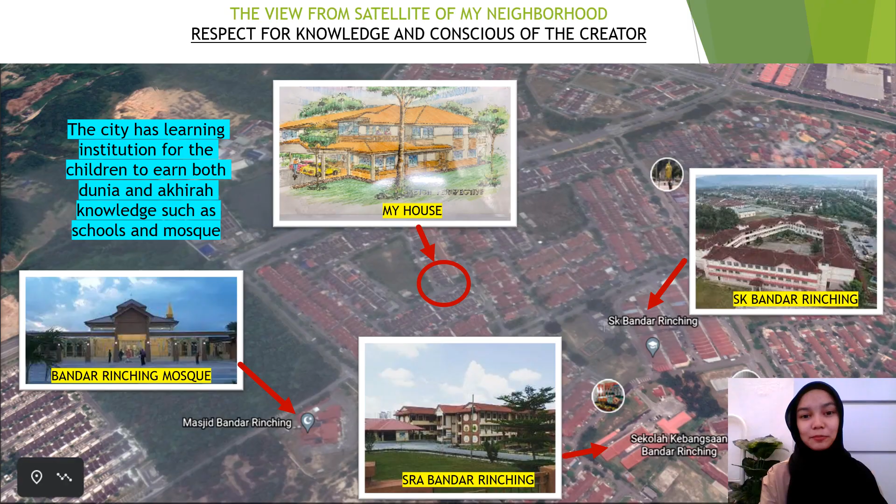Next, as for respecting knowledge and consciousness of the creator, my house fully abides to the principle of Al-Fatiha under the relationship between man and creator. The living room area is particularly used for the household to perform Jama'ah prayer, especially during special occasions such as Tarawih prayer, Salat Hari Raya Aidilfitri, Salat Hari Raya Aidil Adha, and Salat Fardu. This prayer hall has gathered everyone to reunite and perform sujud to Allah Subhanahu Wa Ta'ala.

To be conscious of the creator, having wide windows in each spatial area to view the green nature from inside the house to the outside has given a chance for household members to get closer to witness Allah's creation: the blue sky, the greenery of the grass, and the existence of the neighborhood and humans around the area.

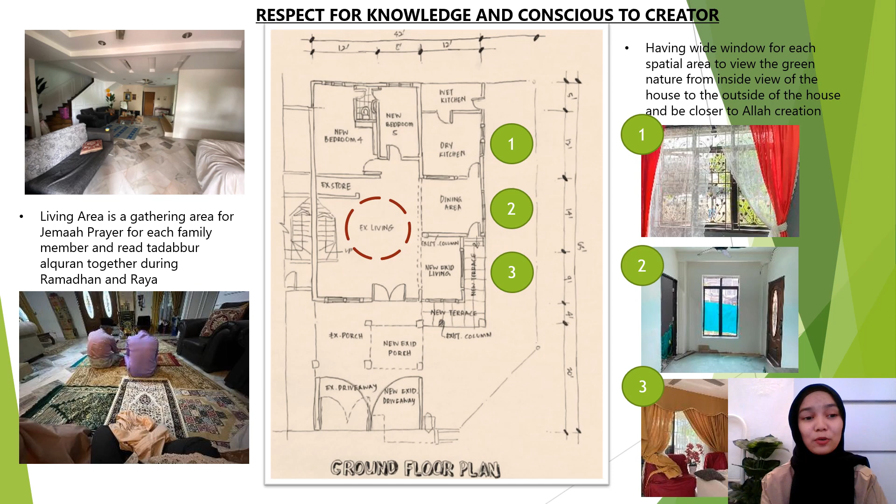Meanwhile, for the first floor plan, in every bedroom certain family members have their own study corner, their own room to gain knowledge, and also a bookshelf. The existing family area is used as an open public office space for household members to settle down with work and a place to earn knowledge, especially during the COVID-19 pandemic, where online classes were held, respecting knowledge throughout the gaining of knowledge.

Therefore, consciousness of the creator has become even greater, as the new balcony is placed facing the view of the neighborhood area, to view the outside world and sky clearly and to cherish Allah's creation upon the environment.

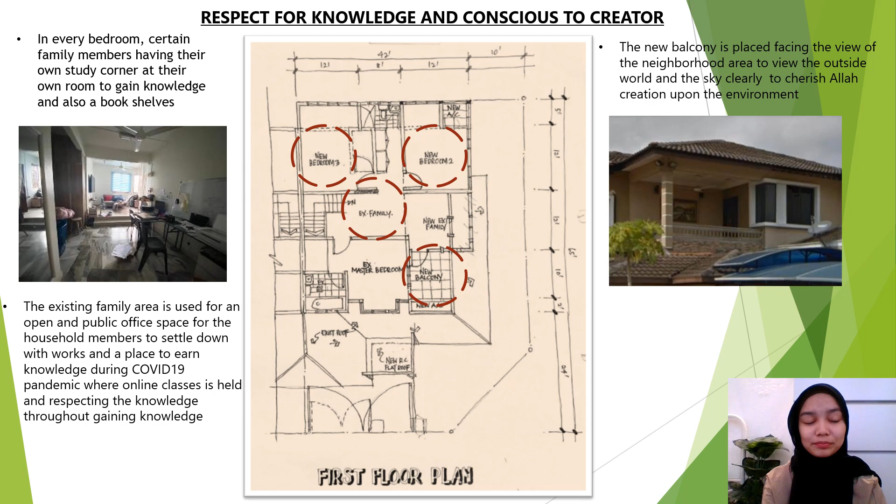Next aspect is the conservation of environment. The courtyard area is used for preservation of the environment by planting many trees such as lemon tree, lemongrass, chili, aloe vera, guava, papaya, mango, and curry leaf tree. This has led to compassion and gratefulness for Allah's blessing of giving land to humans to develop trees that fulfill human benefit to stay alive.

Therefore, we can actually see and observe ourselves how beautiful the creation of Allah is, in terms of the environment, if we conserve them properly and do not manage them in regards of our own interest.

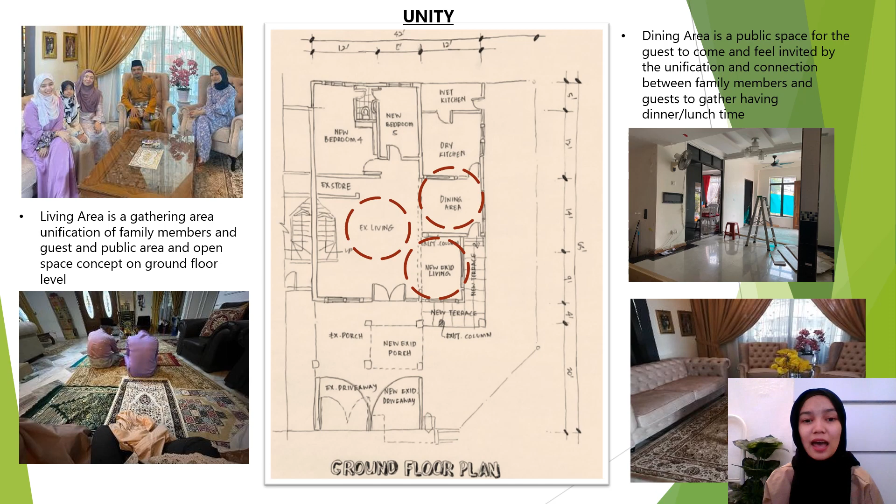Next aspect is unity. The living area is a gathering area for the unification of family members and guests, as a public area with an open space concept on the ground floor level. This area is a welcoming area for guests, especially during special occasions. The dining area is also a place for unification of family members, as a public space for guests to come and feel invited, connecting family members and guests together during dinner and lunch time.

Next, on the first floor of the house, a unification place is also present. The existing family area is used as an open and public office space for household members to settle down with work and earning knowledge, as a place of unification to look out for each family member's development and progress. The study corner concept has no boundaries separated by wall, using an open space concept on the first level of the floor to enhance connectivity among family members.

So on the first floor of the house, there is a mini living room for household members to hang out when guests come around and gather at the ground level living room. Therefore, privacy can be earned and comfort can be reached by house members.

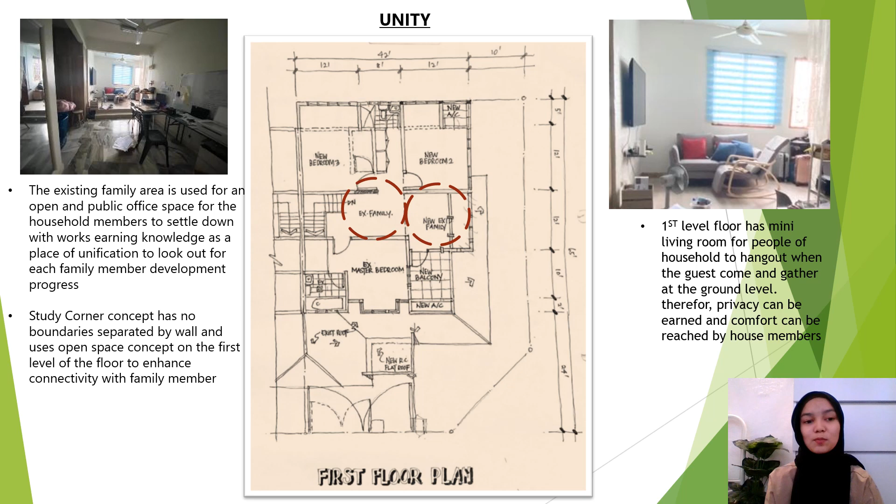Next is justice and compassion. Toilets are placed in a public area with set boundary walls to separate this spatial area. The water closet sits opposite the Qibla direction. The shared toilet is separated with two doors so every room has its own privacy. The storeroom has its own space to keep the house clean and organized.

In our compassion, the wet kitchen, dry kitchen, and dining area are close to each other and placed next to the wide courtyard, to make humans realize, appreciate, and be grateful for the food we are able to eat and be able to live, given by Allah as a ni'mah in the world.

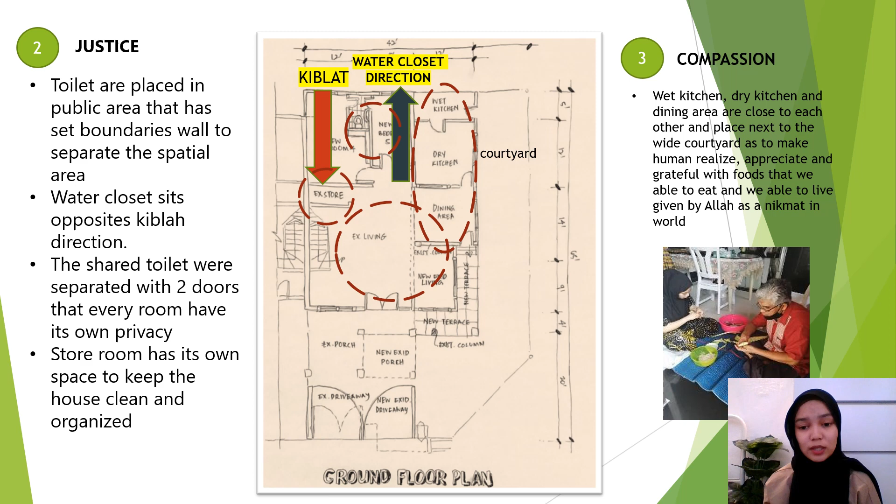Last but not least is trustworthy and credibility. Every family member has their own room. Four siblings have their own rooms, including the parents in their master bedroom. Every bedroom has its own bathroom. Trustworthiness has been embedded in the house for each other.

Next principle is the relationship between man and environment, which includes cleanliness and beauty, preservation of the environment, and sustainable natural resources. For cleanliness and beauty, the dry kitchen, wet kitchen, and dining area are separated by two different walls to ensure the cleanliness of the house when preparing food.

The wet kitchen is a private area, only allowing a few people to come in. To ensure the effectiveness of cleanliness, the public dining area is separated from the dry and wet kitchen. When guests come to the house, the comfort of the guests can be earned, and the comfort of the household preparing the food can also be earned.

The beauty flow of three spatial areas are defined into public, semi-public, and private areas that fit with the function. Next is cleanliness and beauty, where the big dustbin is placed far from the house. The local authority collects the garbage every week, and the landscape around my house is always trimmed by the local authority to cut the grass short.

Next is preservation of the environment and sustainable natural resources. The courtyard area is used for preservation of the environment through plantation, by planting many trees. This will bring back and balance the ecosystem and environment, becoming more sustainable for the house area, and therefore humans will be protected from thunder and storms during rainy days that usually happen in my neighborhood area.

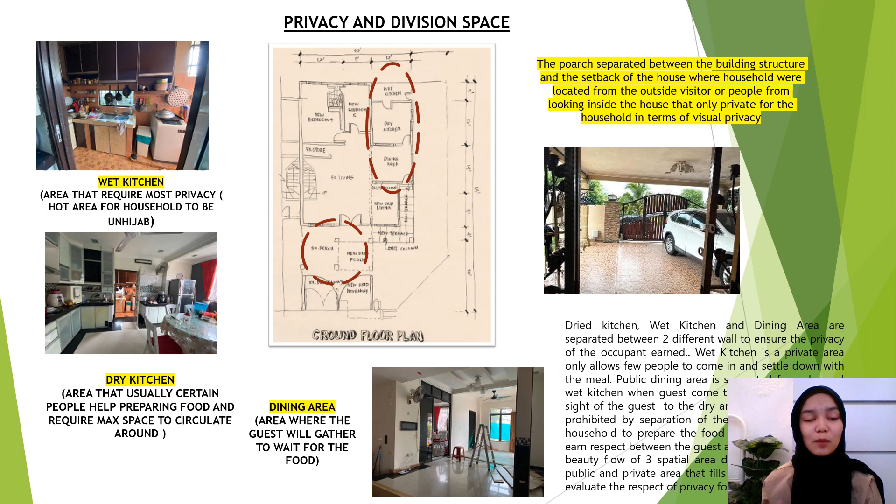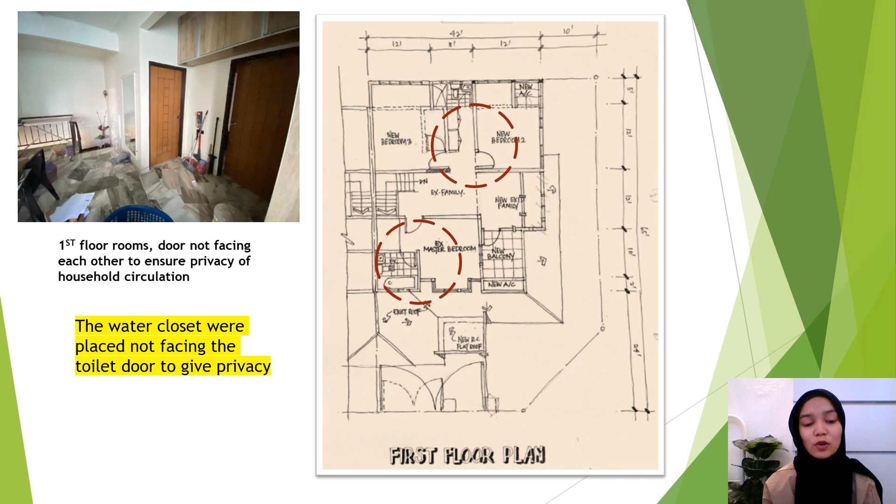The dry kitchen, wet kitchen, and dining area are separated into three different spatial areas to give public, semi-public, and private areas for the household and guest separation. Meanwhile, on the first floor, room doors are not facing each other to ensure privacy of the household circulation, and the water closet was placed not facing the toilet door to give some privacy for the occupants.

The value of encouraging interaction and acquaintance can be reached in the living area, because the living area is a place that often meets publicity among household and guests during festivals to reunite and encourage one another. The area also acts as a place for the household to rest and refresh themselves after a busy and hectic day from work, to refresh and restart again for the very next busy day.

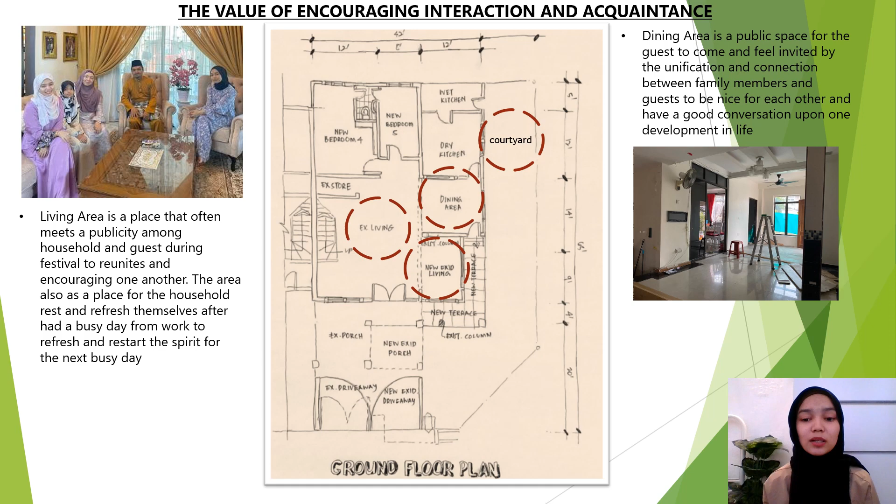The dining area also works as a public space for guests to come and feel invited by the unification, to develop a good conversation upon the development in life.

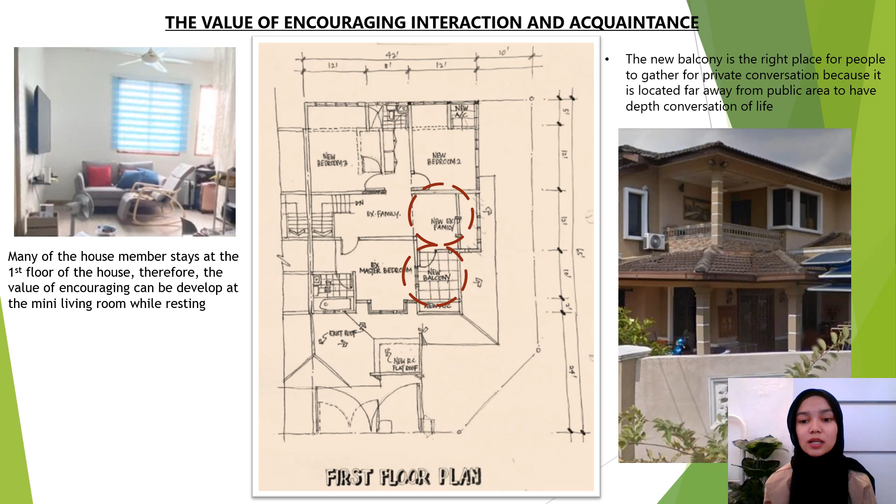On the first floor, many of the house members stay there. Therefore, the value of encouraging can be developed at the mini living room while resting, and the new balcony is the right place for people to gather for private conversation, because it is located far away from the public area to have a deep conversation of life.

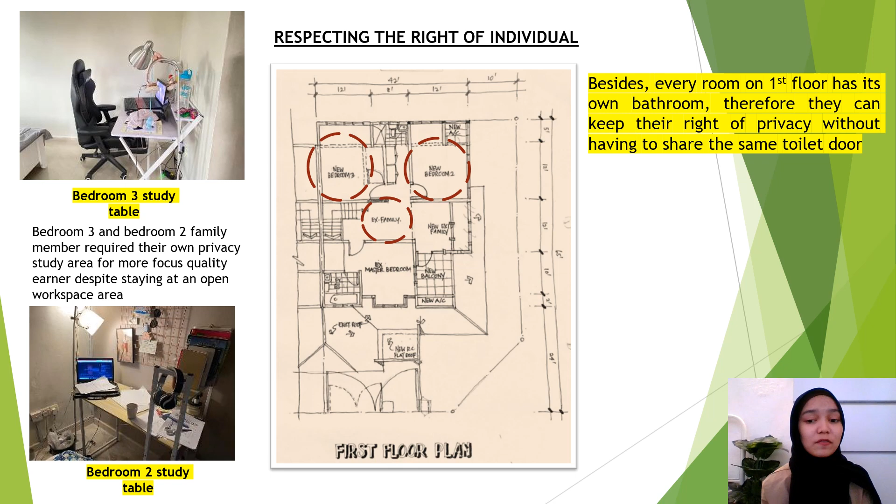Next is peace and security. The house is secluded with a wall, gate, and high gate lock. The automatic gate can only be accessed by the household, as the neighborhood does not have a security guard, so anyone else cannot access inside the house, as the automatic gate has already secluded the security of the house. The house is also secure with the automatic high gate, with a huge water drain separated to avoid robbery happening in the house.

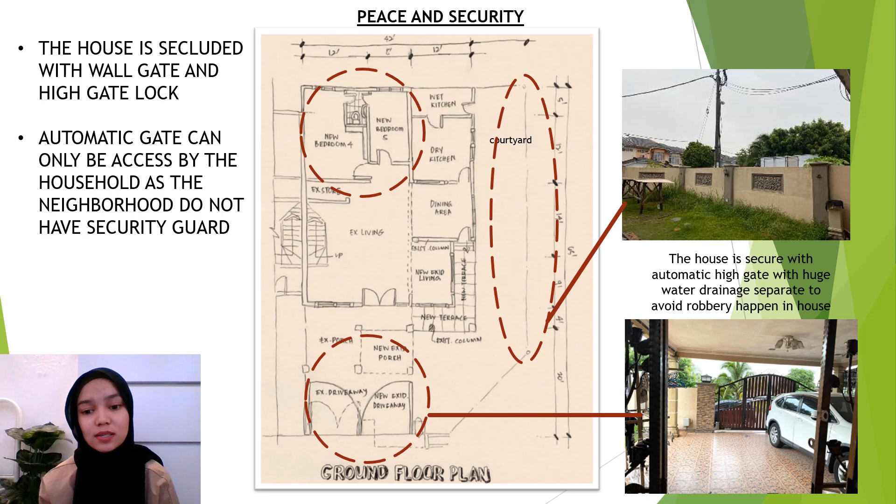As for consultation, the living area is chosen as the perfect place for a consultation session among family members because of its open space and public area where people will gather around.

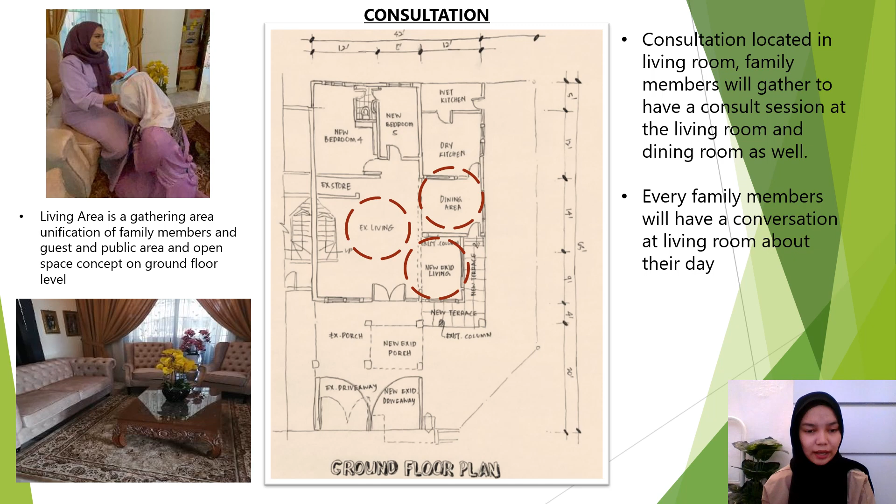In conclusion, there are still areas left behind in my house that I need to enhance more in the future, so I can achieve the type of building evaluation that comes along with the guidance of Al-Fatiha for a better building environment. I think that's all for my presentation for today. Thank you very much.